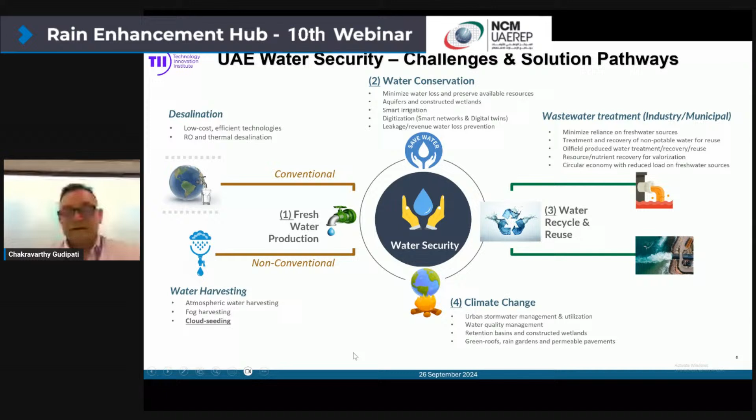Then monitoring and management of the water quality for reuse, and what are the ways that these goals can be achieved is something I'll talk about.

In our group, our research focus is mainly aligned with all these concepts that I just showed, towards a singular goal of making sure there is water security which is sustainable and future proof. So that's why we work on production technologies, including desalination, and then distribution of the produced water or even wastewater by basically smart technologies, digital technologies, and also planning for distribution networks. And then utilization of that produced fresh water, making sure the right amount of water goes to the right place. Just to give you an example, we look at areas like soil enhancement, where not much water is needed.

Only the right amount is discharged to an irrigation site, so that saves a lot of money, basically. And finally, we also look at treatment of wastewater from municipal and industry sectors, and how that treated wastewater can be used for different purposes.

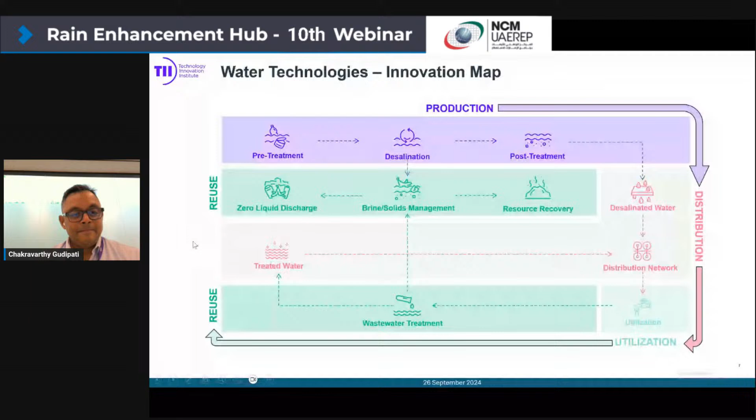And of course, there are specific targets, technical as well as strategic. For example, desalination, as many of you might know, is a very high energy intensive technology. So how can we reduce the energy consumption in that process and also extract more fresh water for less energy? Then basically usage of the recycled water, how can we increase that from the current 60% to more than 90% in the country, and also reduce water leakages in the distribution networks.

And basically how do we harvest non-conventional freshwater sources? Of course, rain enhancement program is one thing, but also moisture in the air, how can we harvest that, and use that water for decentralized agriculture and landscaping. Of course, in the Middle East, basically the main desalination technologies, and there's about

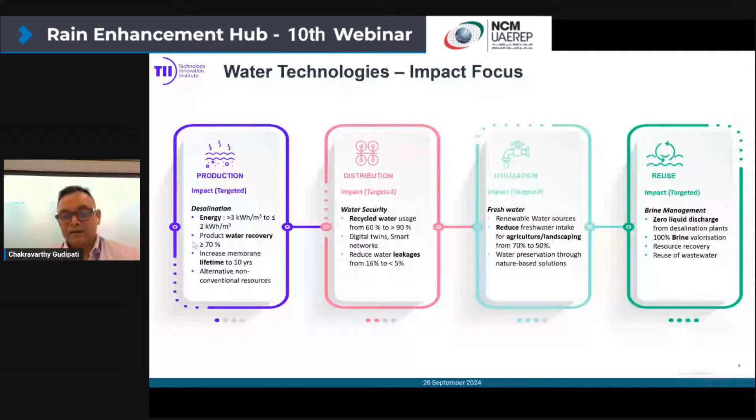100 million. Most of it is basically in the Middle East and North Africa region. And these desalination technologies rely mostly on reverse osmosis. Until recently, of course, a few years ago, the dependence was more on thermal due to commercial challenges. It is slowly moving, actually fastly moving, toward reverse osmosis-based desalination.

So thermal desalination is a method where, in a nutshell, you evaporate the water from, let's say, the seawater, and collect the evaporated water as a condensate, which basically has a lot of footprint. And to make it more sustainable, thermal desalination plants usually have to be co-located with power plants where there is a lot of waste heat.

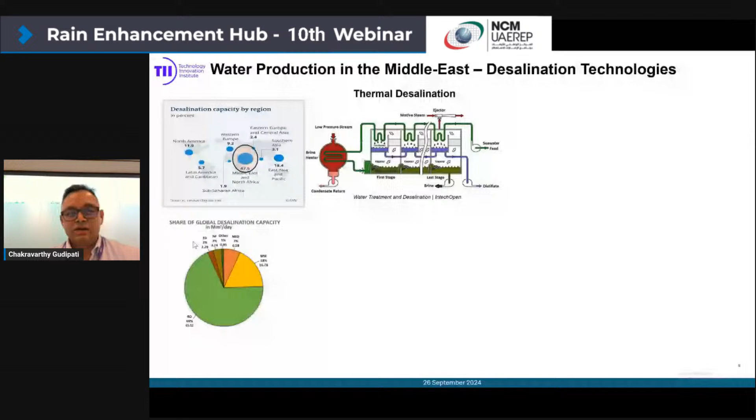So the energy consumption takes about more than 80 kilowatt hours. It can reach up to 100, 110. These are very baseline average numbers. These energy numbers can go up even further depending on other weather conditions and water conditions. There are high infrastructural costs, and of course the water quality - by heating the water at high temperature, it may not remove all the contaminants like volatile organic compounds, and then you still have to treat them further to get the fresh water out of it.

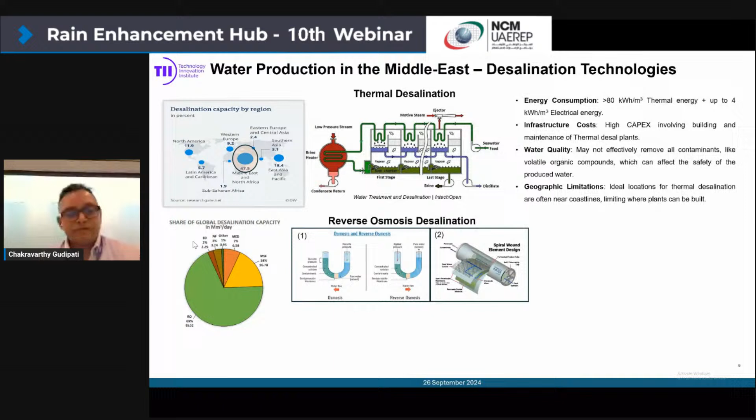And like I mentioned, there are geographic limitations. These plants need to be near the coastlines because of the emissions, as well as the need for power plants and also the proximity to seawater. As an alternative, reverse osmosis mainly pushes water from the seawater side at a high pressure. I won't go too much into the details of the reverse osmosis principle, but it's also a very technologically mature process. It's been around for more than 50 years now.

And what you see here are membranes divided into different components, which we call elements, assembled into modules, requiring high energy consumption, mainly because you're pressurizing the seawater feed up to 70 bar or even higher to extract water on the other side of the membrane. And what happens is only 50% of seawater comes out as fresh water, and the remaining 50% remains as a very high concentrated brine.

And the usual practice is the brine is discharged back into the sea, which causes marine environmental problems. And of course, there are high operational expenses because there's a lot of things needed to keep the membranes clean. And of course, as alternatives, more feasible, less energy intensive processes like rain enhancement programs exist.

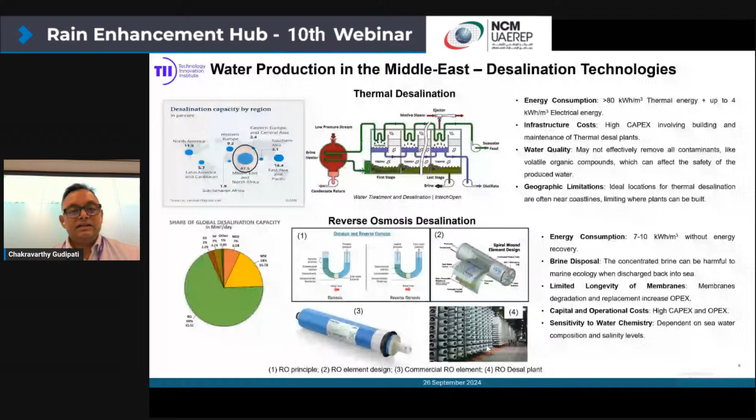For example, as many of you might be aware, it practically means injecting silver iodide or some salt or even dry ice into the cloud at supercooled regions, where flares of the chemicals, especially silver iodide, are shot into the cloud, and the updraft carries them to the supercooled region. Or these chemicals can be dropped from aircraft, basically leading to excessive precipitation and seeding, resulting in hail, rainfall, or snow.

Of course, there are advantages in the way of increased precipitation. This helps control extreme droughts or unpredictable droughts. And of course, there are benefits for a specific area of interest where there is vegetation or where vegetation needs to be grown. Depending on the cloud conditions, that area can be basically cloud seeded, and the vegetation or the process can be helped there. Overall, this is a good measure, a nice measure to mitigate water scarcity.

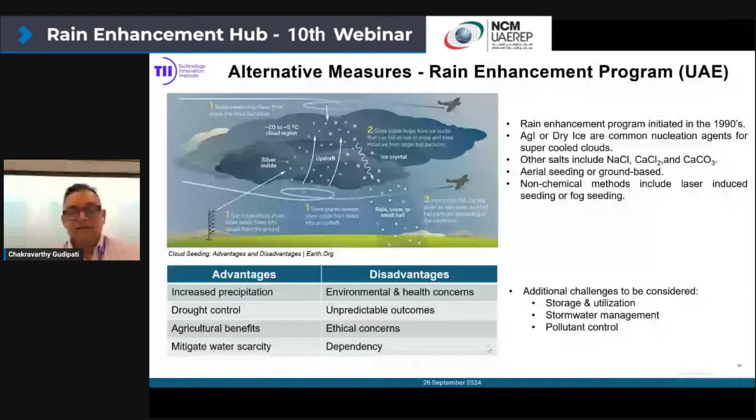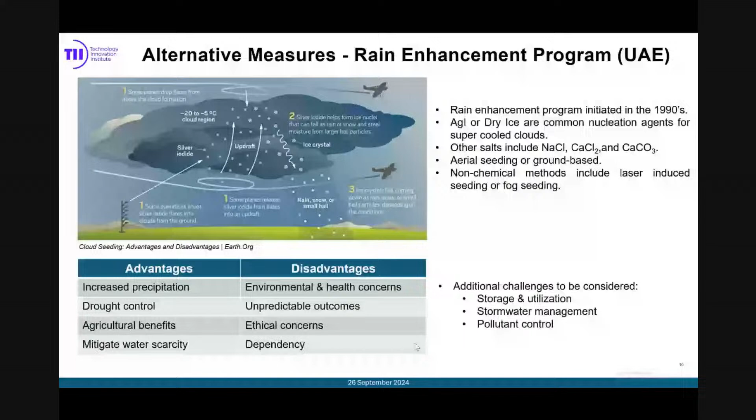And more importantly, what about pollutants? Because it's not just the pollutant - what about the pollutants in the groundwater? That has several aspects that can help with ensuring water security for UAE, or for any country that is water scarce.

And of course, the factors that need to be considered are freshwater production and rainwater harvesting. For example, in UAE there's about 200 millimeters of annual natural rain. How do we collect whatever we can from that rain, and how do we store it safely, not just for immediate use but also for long-term storage, so the collected water can be used for potable applications?

And of course, there is a risk of floods from stormwater. How do we basically plan for mitigating these flood risks resulting from storms? There are several approaches, and this is what I'm going to talk about in the next few slides.

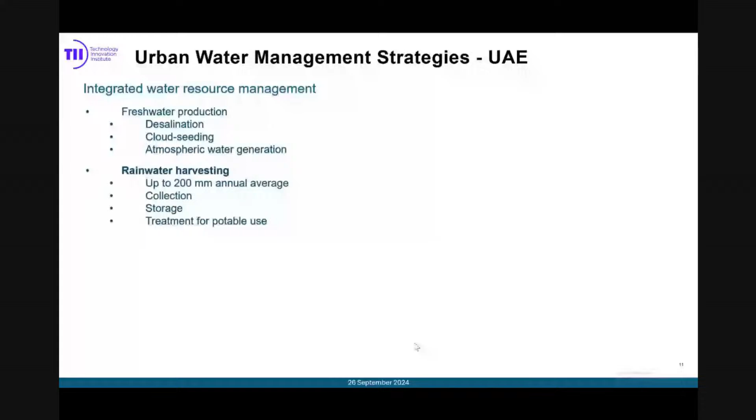It's very important to consider these because, as many of you remember, the Dubai floods a few months ago - contrary to popular belief, they were not caused by cloud seeding; they were natural storms. And of course, there were floods and storms in the Al Ain region back in February this year, and that was a result of cloud seeding. So in both scenarios, obviously there has to be more planning and implementation that can mitigate the impact in the future.

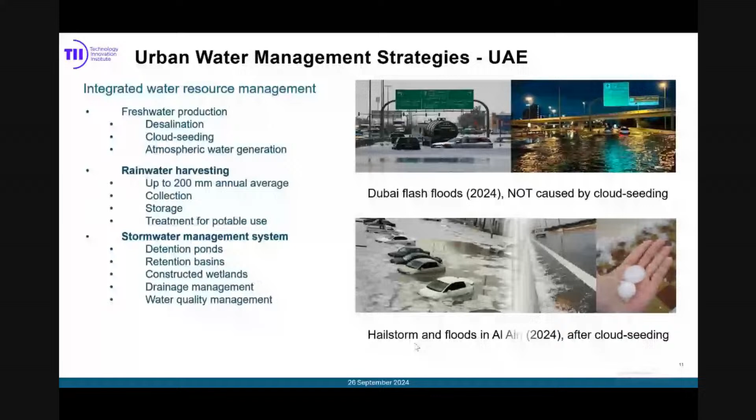And how can we harvest that water, and the reuse of that treated water? More importantly, how can the community, people, the municipalities, residential areas, and industries all be integrated into this engagement to make them stakeholders, to change the mindset about saving water, conserving water, and harvesting available water or stormwater? All these factors like water supply solutions, stormwater management, responsible water utilization, and wastewater management contribute to security.

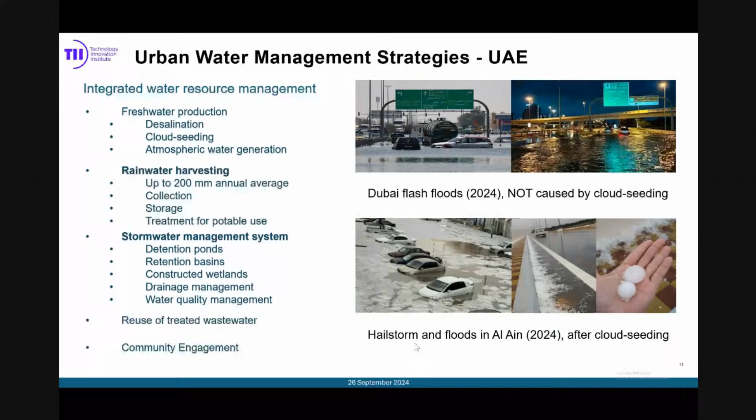Of course, UAE has done a lot already to ensure water security, but there's always more things to do. For example, desalination, like I mentioned, is the main workhorse - there's about 7.6 million cubic meters per day of desalination capacity in the country. There are also dams and rainwater harvesting projects, like Wadi Al Beeh in Ras Al Khaimah. And there are also aquifers for groundwater storage, and Liwa for long-term storage of treated water for emergency purposes.

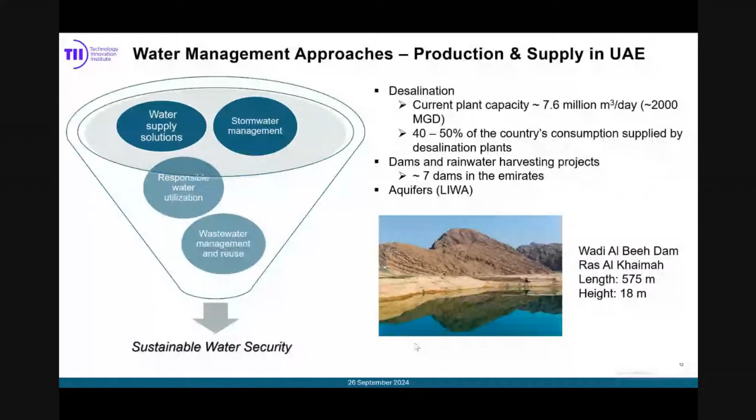So, having said that, I want to move towards the similar water resource management strategy adopted by Singapore, implementing new innovations at every step, right from production all the way up to flood mitigation, storage, and usage.

So just a brief introduction: 5.6 million people, 750 square kilometers - as you can see, it's a very small country with very limited freshwater resources. About 2,500 millimeters of rain annually, and the freshwater demand is about 450 million gallons per day, and that will only grow as the population and industrialization grow. Without natural lakes or aquifers, Singapore had no choice - the main source of freshwater is from what we call the Four National Taps, which each have different percentages of contribution.

So one basic source is the local catchment area where rainwater and stormwater is collected, like the one shown in this picture. It's called a Marina Barrage, about 280 cubic meters per second capacity. And reservoirs—there are about 17 reservoirs in the country. I'll show a couple of pictures soon. Some part of the water is imported from Malaysia.

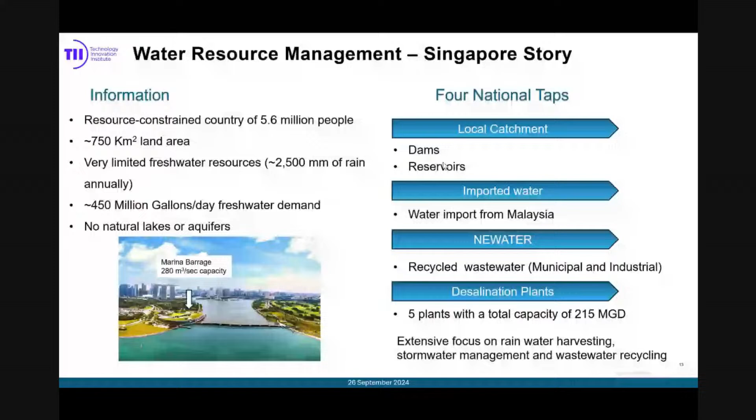But Singapore has placed a lot of attention towards rainwater harvesting, managing stormwater, and wastewater recycling as well. Towards these initiatives, especially the urban water management strategies, all these were planned and implemented a few years ago. There was a lot of extensive planning time before the development picked pace.

One such example is basically the use of almost 2/3 of the land around the island, and there is an extensive drainage system, a drainage network that was built along the walkways, along the side of the road, where the water that is collected from rain basically...

Of course, like I mentioned, there are 17 reservoirs. Again, it also helps with beautification of the city-state. But more importantly, it stores...

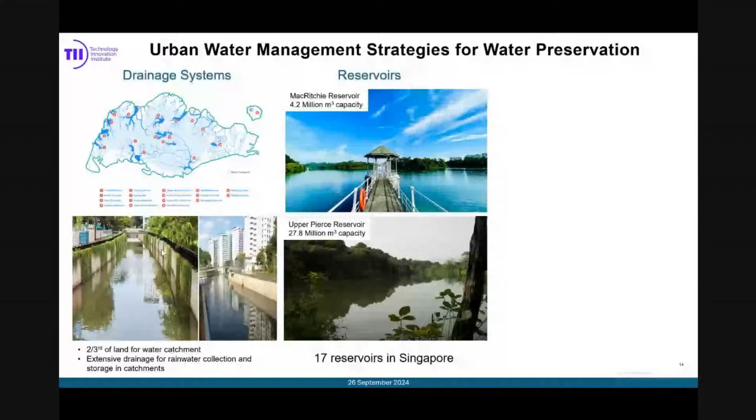There has been a lot of emphasis in new developments to go towards something called green roofing, where the buildings are made of green, and this green roof or eco roof is being implemented in almost all new developments in the real estate sector.

So there are many advantages for this. It not only helps environmentally by lowering the temperature, for example, or improving the air and water quality, but it also helps with regulating the runoff flow. Whereas with rain, the roof is the first thing that gets hit, and instead of all that water running off uncontrolled, it helps sustain the vegetation and also helps regulate the flow of stormwater that can be further treated and collected in subsequent steps.

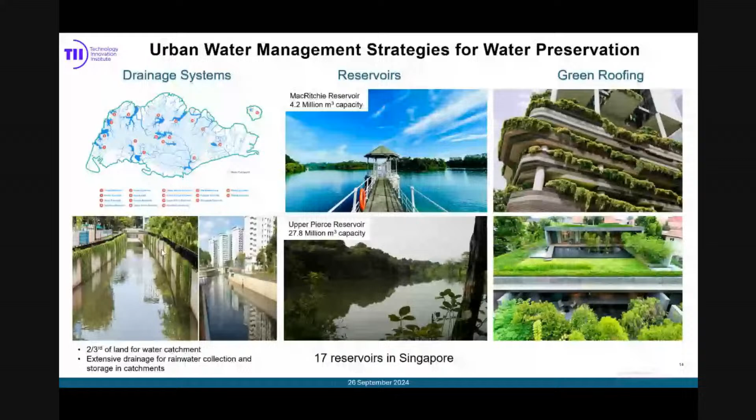Another approach used by Singapore was something called ABC Waters Design, which stands for Active, Beautiful, Clean Waters Design Initiative, that was started back in 2006. This was mainly to harness the full potential of the water bodies—the source of the stormwater, the pathways that take the stormwater, or even the receptor platforms.

At every stage, they wanted to harness the full potential of the water by integrating those drains or canals with the surrounding environment, making sure there is an interface between the water body and the vegetation and greenery everywhere, and also, more importantly, a very well-connected network for regulating the stormwater.

Examples are these detention ponds where the water can basically be held after the rain, or the decentralized detention tanks, or even rain gardens, which are bio retention ponds. So all these areas help regulate the flow, slow down the flow of the runoff from the storm.

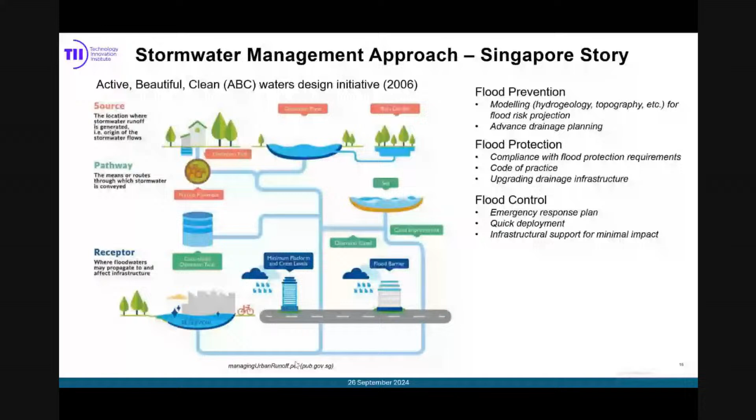What are the other key solutions that can be used? Basically, something that's become slightly more mature recently is called nature-based solutions. So instead of conventional drainages or conventional retention ponds or detention basins, you can use bioswales or biodetention basins, areas where the water temporarily stays and then runs off, and these basins remain dry between storms.

And of course, if there is vegetation grown into this detention basin, it's called a biodetention basin. In addition, there is a bioretention basin, shown in the left bottom image. A typical design looks like this: the inflow of the stormwater comes into land that has a lot of densely planted vegetation.

What that vegetation does is sustain the stormwater and also regulate its flow, preventing any flood risk downstream. It also filters some of the contaminants in the stormwater, like sediments and coarse particles, enhanced by using another layer of bioretention soil which is finer and has the capability to remove even more pollutants. So it's reducing the storm flow and also filtering and treating that stormwater, at least to an extent that it can be safely discharged into a catchment, reservoir, or other storage area.

So how are these sub-systems integrated? I'll give you an example of a pre-development design for, let's say, a park or building that is based on this ABC waters design. You have the building on the left with the green roof on top.

So what does the green roof do? As mentioned earlier, it cleans the water up a little bit, and then lets it flow through. That water running off the green roof is collected in small planter boxes, which are small enough to store water. So what that does is basically reduce the flow of the stormwater.

It can either be diverted to a local detention tank where the stored water can be used for non-potable applications, or it can run off or be conveyed through a series of vegetation, like bioretention swales or basins, which are more shallow, or even a gravel trench, to ensure that water is properly pre-treated before it's discharged into the waterway. What that does is reduce the need for more costly and heavy treatment methods for the water.

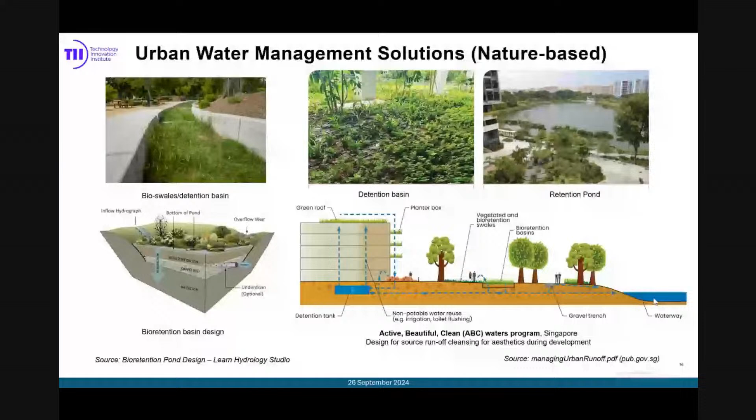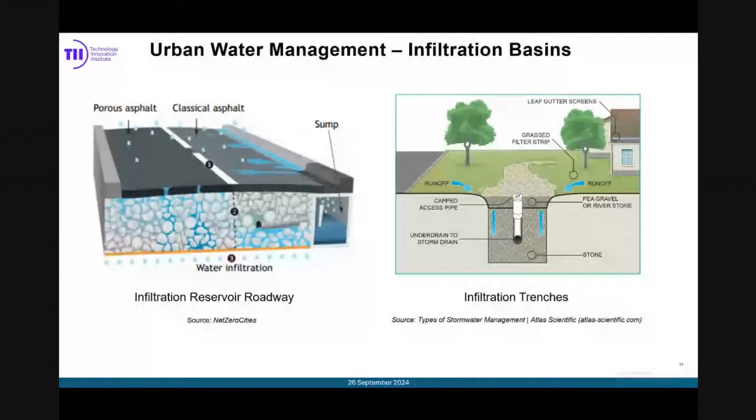The main differences here - there are several innovations happening in this area. For example, I mentioned the main advantage of having infiltration trenches. The same concept can be applied to pavements, what they call permeable concrete pavements. They use porous materials in the asphalt layer, where water can seep through all the way to the subgrade and into the ground, where it can be primarily treated and then discharged into water bodies for storage and utilization.

Within the porous structure, it mainly removes any pollutants or contaminants in the water. Once implemented, I think it'll be a very important measure because it takes away a lot of the need for downstream technologies for removing those contaminants. In fact, people are using porous asphalt.

So all these, of course, can be implemented for existing infrastructure or in advanced planning for infrastructure that is going to be built. And of course, not every solution is applicable in every region, but nevertheless, they contribute to the long-term sustainability of water security and stormwater management.

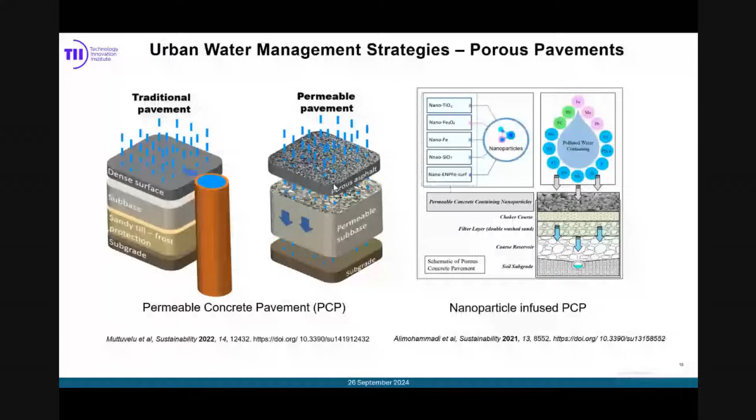None of these technologies are complete without a digital component, because digitization or the use of tools like artificial intelligence, machine learning, or Internet of Things can achieve a lot of maturity, resilience, and sustainability against future events. All of them digitized and smart, so we can understand risk events and implement mitigation steps well in advance.

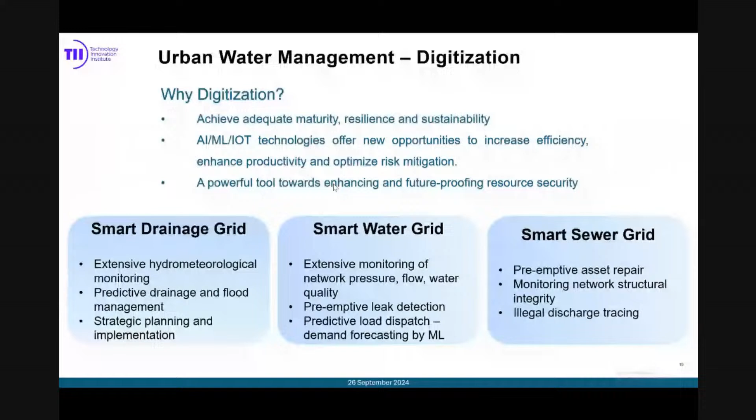Specific examples of how digitization can help: the Internet of Things, for instance, there are a lot of sensors in desalination plants and even distribution networks. You can have those data analytics tools that give us a big picture, advanced insights, and even prediction of events, helping decision making about how a specific network or flood-prone area can be managed.

Digital twins are a very important tool, and a lot of countries and regions are adopting this. This mainly means creating a digital twin, which is a smart approach. This helps with scenario evaluation, because we have all the necessary information there - the infrastructure, the drains, the network, everything. So a lot of simulation can be done to evaluate possible risk scenarios.

For example, what happens if, as part of the cloud seeding program in this region, there is some unpredictable weather pattern or flood in another area? What are the risk mitigation steps that can be planned for in the future?

Again, AI and autonomous systems are very important. Robots, like sensor robots, drones, or even unmanned vehicles, are being used - not very extensively yet, but in Singapore in some areas - to monitor drainage or sewer networks for any kind of contamination. So all these tools can help.

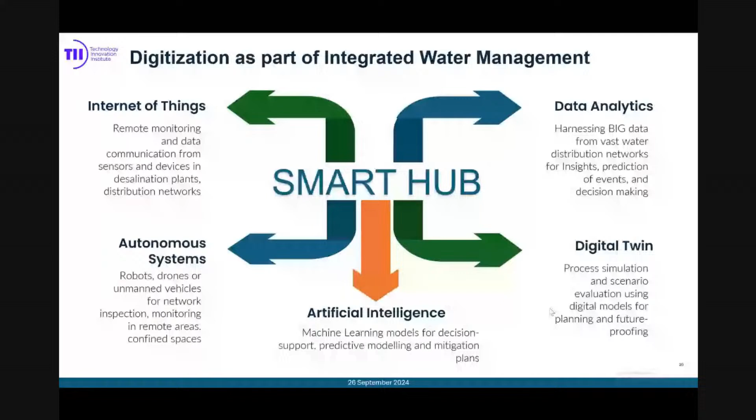Another approach, somewhat a distant cousin to cloud seeding, is atmospheric water harvesting. Technically, this means extracting water from moisture in the air. As you can imagine, it's a renewable water source, and you can harness the water anywhere - wherever there is moisture, relative humidity, and a certain temperature.

The technology itself is such that you can use it in remote locations, for example, where having fresh water pumped in for irrigation could be cumbersome or even costly. So in such areas, using this technology makes farms and irrigation self-sustaining.

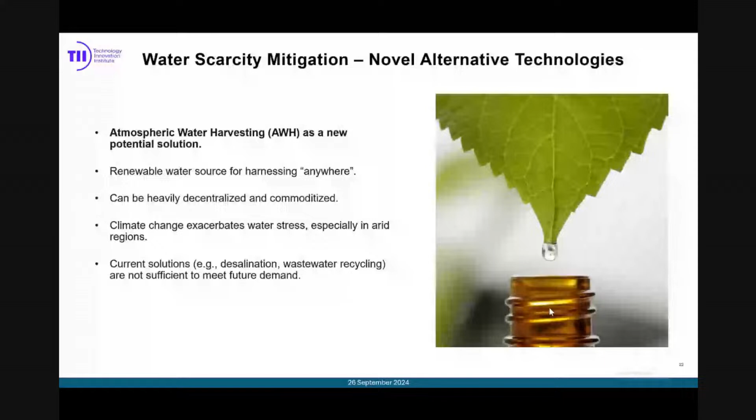Without going into much detail, there are different types of atmospheric water harvesting systems. The most prominent and even commercialized methods - many of you might be familiar with active methods, while others are more passive, using adsorbent materials that absorb moisture from the air.

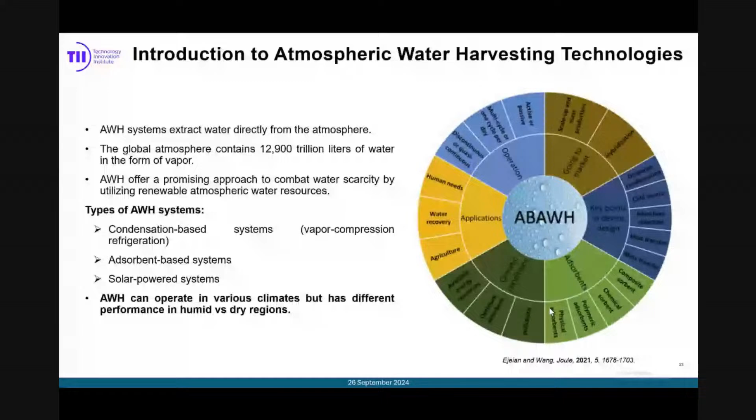The active method is the refrigeration-based method, and there's another, less refrigeration-based approach. Of course, all these processes require energy to convert that vapor into water. The ideal situation is integrating these technologies, whichever matures, with renewable energy sources so they do not add any further carbon footprint.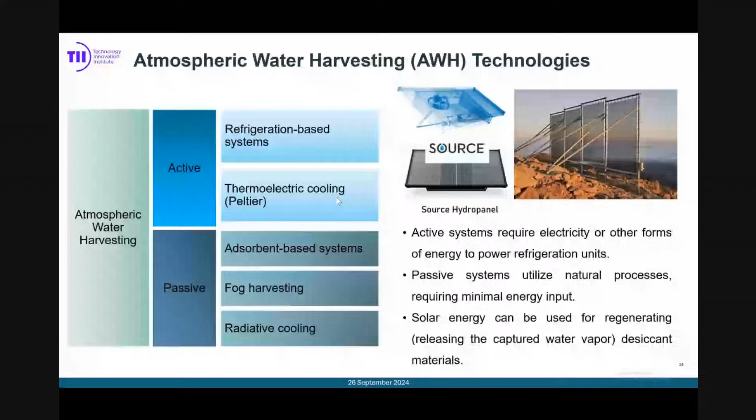So the vapor compression cycle, just a quick run-through: it basically depends on evaporation, compression, and condensation. The moisture-laden air goes in and gets cooled within coils because it loses heat to the cooled refrigerant flowing in those coils, and that cooled water is condensed and collected as fresh water, while the refrigerant is recirculated after evaporation, compressed, and then condensed.

Condensation of the water vapor isn't that easy - it depends on something called the dew point, which is the temperature at which relative humidity is 100%. The incoming air has to be cooled below that dew point in order to achieve condensation of vapor and collect a decent amount of water.

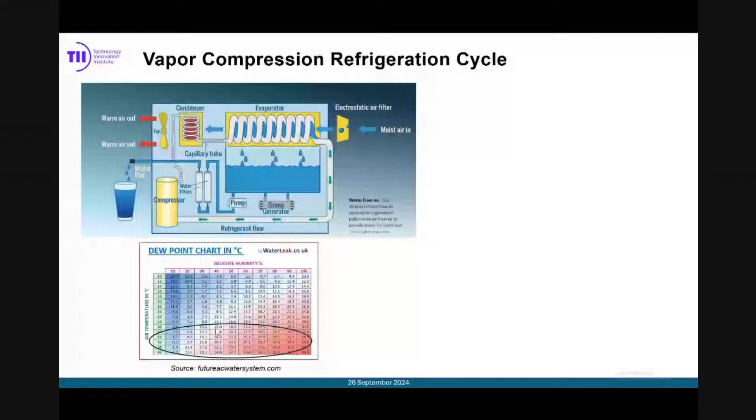And it's not just the energy consumption, it's also the use of refrigerants, for example, chlorofluorocarbons. They're environmentally damaging. People are researching more greener refrigerants to address that.

It takes about 300 to over 1,000 watts per liter to produce water using this technology. And why is that so? Because of the temperature and the weather conditions.

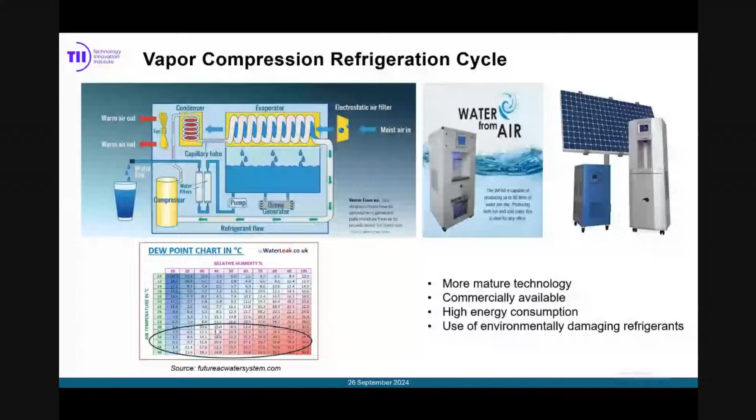As you can see in this chart, based on different parts of the globe, it's high. It's close to 250 and above in this region, in Asia particularly. So that's why implementation of this technology at scale might be challenging unless more energy efficient systems are developed.

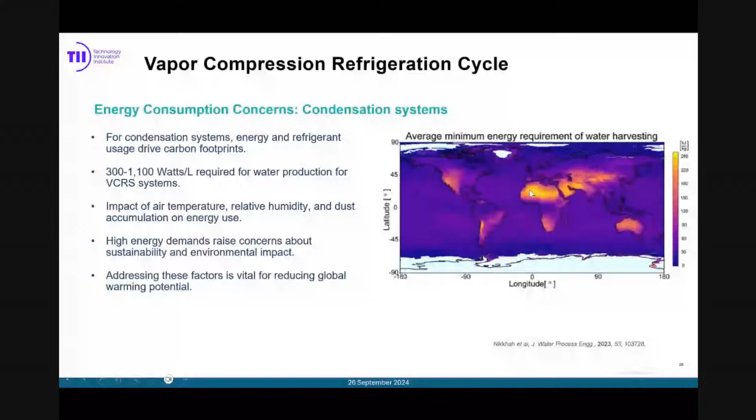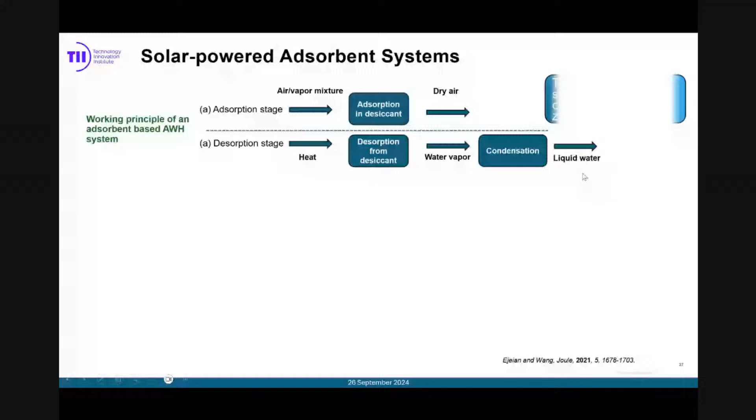So there are different materials that are used as desiccants, for example silica gel, very common, and lithium chloride and zeolites. Of course the efficiency, productivity, and the cost and everything still have to be

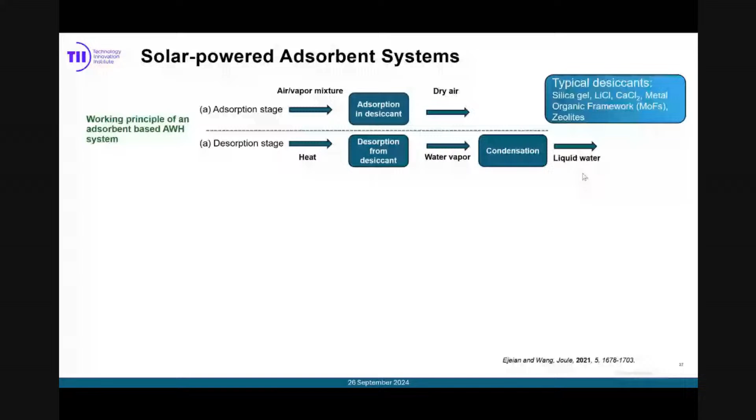evaluated more thoroughly because most of this work is still in progress. For example, you can integrate these systems just like the previous vapor compression systems, or you have the device with the material, and there's a condenser. Whatever moisture is absorbed, basically, the whole process becomes efficient.

And of course, a lot of research, including in our group, what we are working on is different materials that require less energy to desorb water, and also system designs that take much less energy.

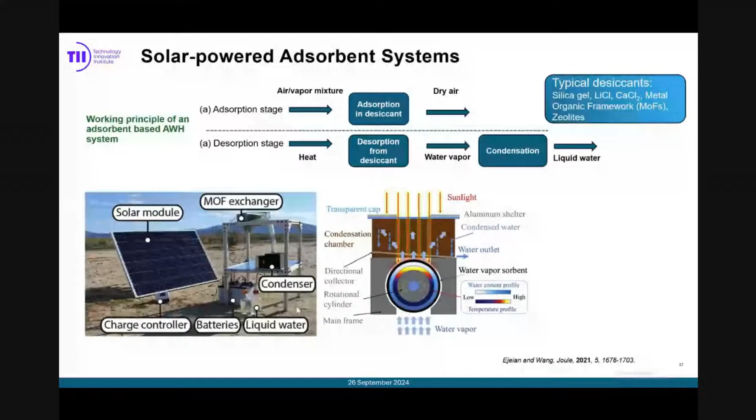And not just that, we are also looking at using these technologies, like solid desiccant and liquid desiccant, for applications in different regions. That means some of the materials and devices work in areas where the temperature is low or the moisture is high. But what about the majority, where relative humidity is not more than like

30-40%. So we are working on systems that are low energy, but also can be used in all environmental conditions.

And hopefully in the next webinar, if I get a chance, I can talk more about this.

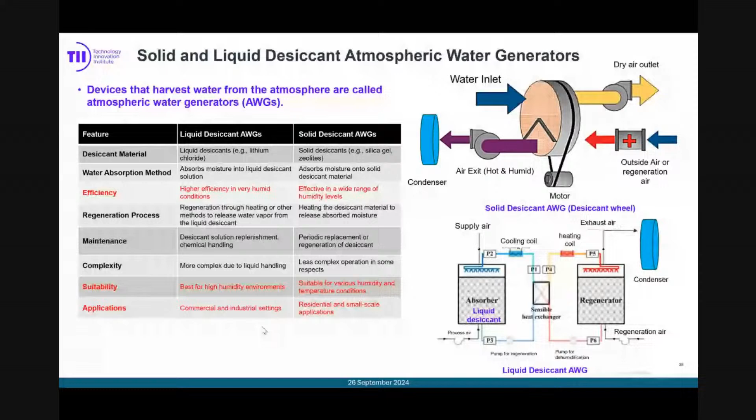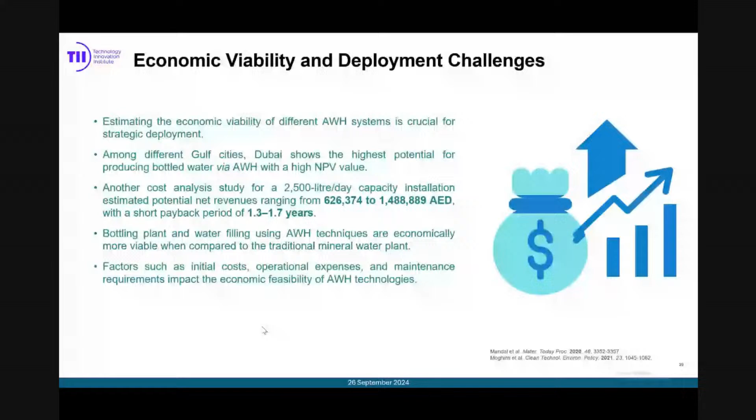So in conclusion, as we have seen, atmospheric water harvesting gives renewable water from anywhere. And with these new technological innovations, we can look to apply these technologies in any environmental conditions: in disaster relief areas, flood-prone areas, or remote areas, and completely off-grid by integrating with solar. So these are all the main advantages.

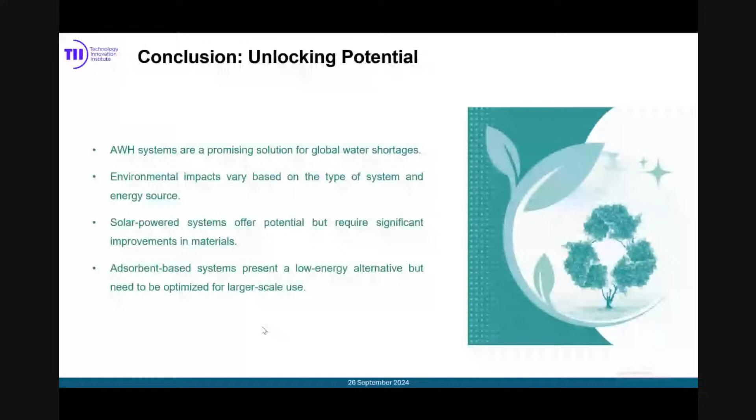But finally, I would like to reemphasize something I've already mentioned: integrated water resource management for sustainable water security. It is basically a blend, a combination of all these approaches working in tandem with each other.

The production side we have seen, so I think we're good there. Distribution and resource management: of course there's a need for green infrastructure for circular economy, and smart incorporation of smartness into water collection and distribution networks, and of course innovative approaches to water storage, whether it can be centralized ponds or decentralized units within a community or even houses.

And how we use that water also is very important. Of course, consumption-wise, opting for more off-grid technologies or decentralized technologies or more smart methods within facilities for either landscaping, irrigation, or water usage. And of course, recycling and reuse, which is more of an industrial process.

There are technologies available, and a lot of innovations happening, not just to extract water from the wastewater, but also any minerals, for example nutrients or salts. So all these are something that we are working on.

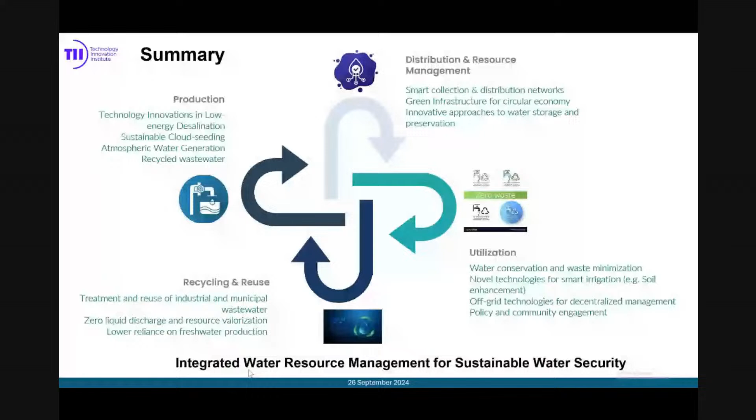This has given a good picture of what is needed for managing urban stormwater and the overall water security scenario. So with that, I thank all of you, and my details are there in case anybody needs to have a discussion about it.